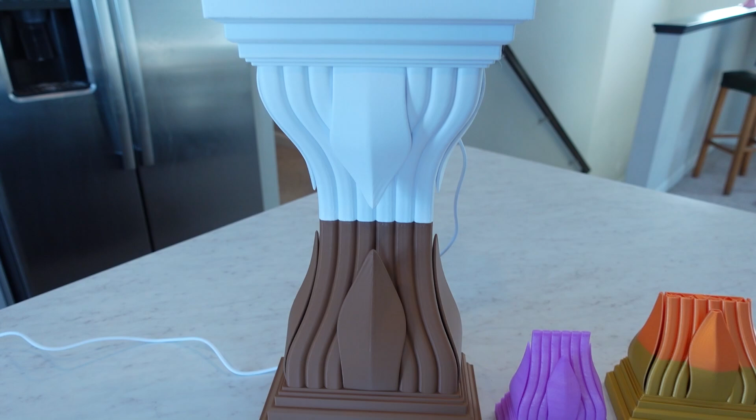Today I want to discuss my process of designing this floating shelf you see here. This floating shelf took approximately $60 so far in filaments. You know, that's part of the game. I just want to say that I love 3D printing. It's good to share what I've been doing and take my lumps along the way, and hopefully you guys learn some things too, as I am.

But this is the white I'm going to go with, cold white, for my first mass production, and that will be for Amazon. I'll list them on all my sites, but mainly for Amazon, and we'll see where we go from there. Hopefully we can go different colors, people will request different colors. The process of it is so awesome, having a new product line, bringing things together.

The one thing that was a huge main flaw, as you can see, this is a glued together one, and they just kept failing, over and over and over again, right here on the supports. I tried four different styles of supports before I decided to design my own supports.

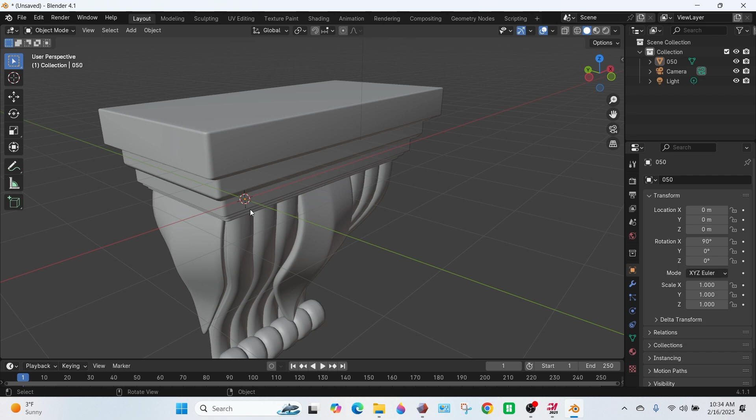So the first thing that's going to happen is it comes in as an object file. What you're going to need is Blender to open that file. So here's the object file open. Then you're going to export this as an STL for the other softwares so they can read it.

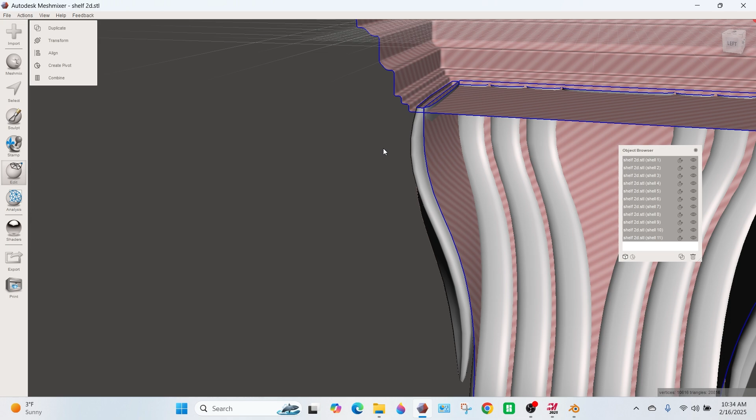So immediately you go into Meshmixer, because I knew it was all just shells, there's no 3D model here, this is all just shells. So what I had to do is go into it, there's a whole lot more, but here's my last imperfection, this huge gap. So you've got to separate shells, go in here and translate this stuff around till all the shells come into play correctly.

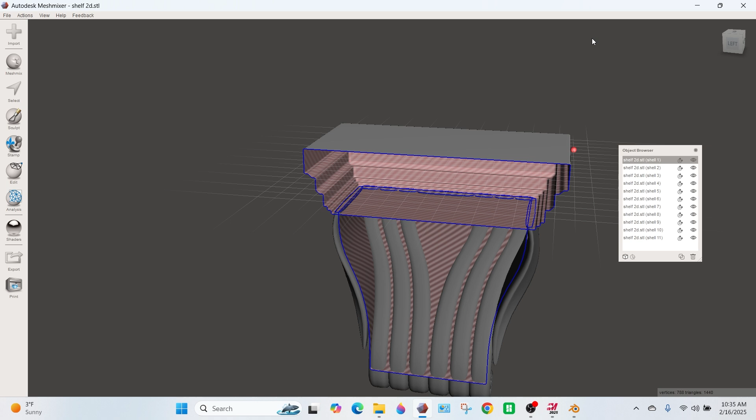And then after that, you're going to want to save that out again as your STL file. At that point there's going to be huge triangles in there. After this, what you want to do is smooth it out.

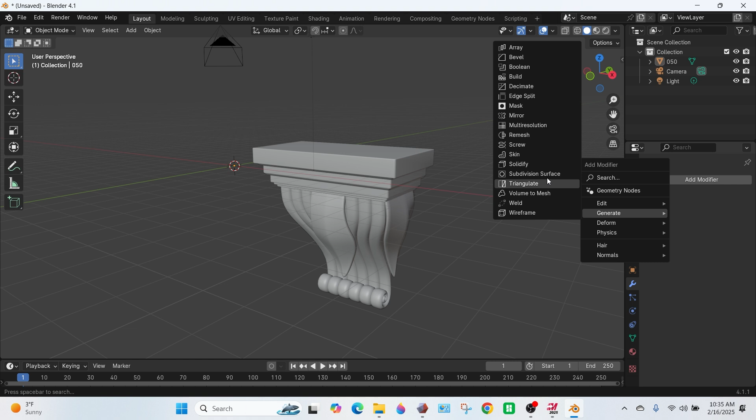So we bring this back into Blender. We do the modifier and add a subdivision surface modifier, is what we're going to add there. We add it all the way up to 4 on that, and we just do a subdivide to smooth the surface.

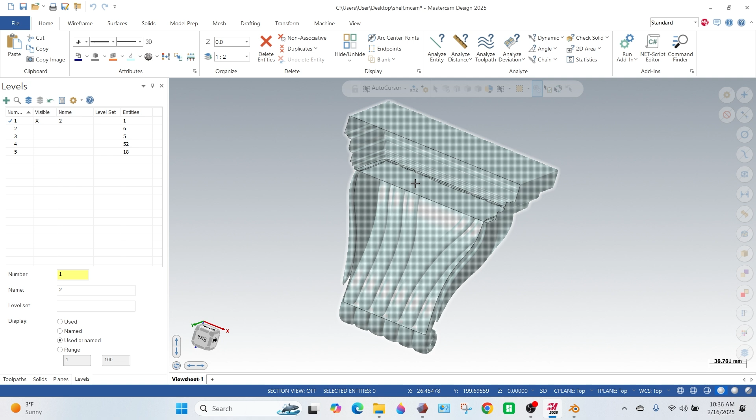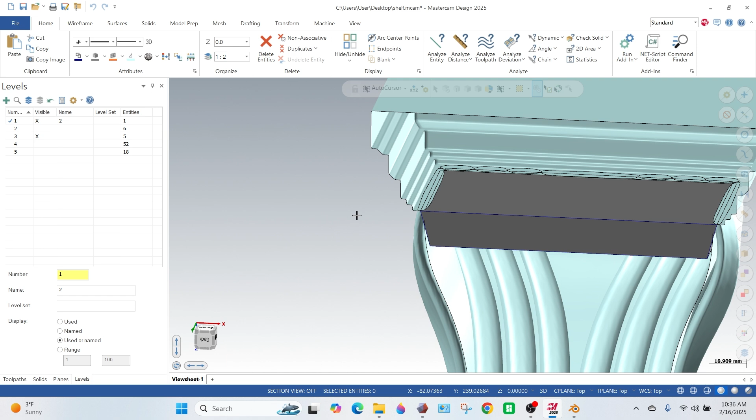Then after that we bring it into Mastercam, and I want to close this. I've already closed the top of these with this surface here, but that surface is getting in the way in Mastercam, so I needed to add the back surface to fill it all in flat. And then I needed to add this surface in here. I added a solid block in there just to make sure it's not going to pick up any air in there, because it did.

So I had to put that in there. That block is just to fill up a void of air in between. There's a micro lift of probably 0.2 millimeters in there that I had to fill in, so I just put a block in there. And now what was going on was...

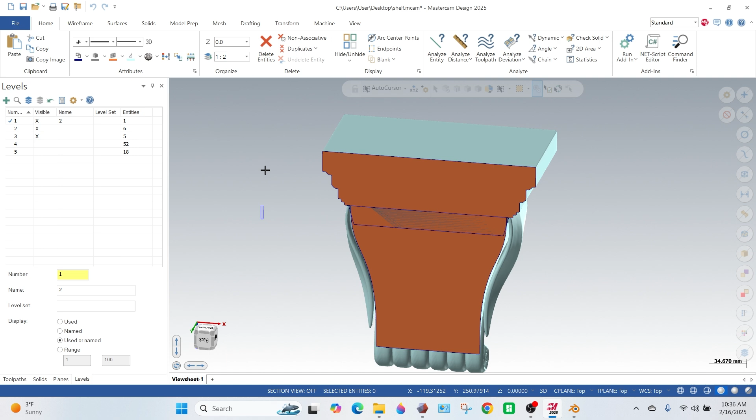my supports are breaking right here and right here, constantly breaking on the ends of these, constantly breaking right here. I had supports go right here, I had supports go all the way to the bottom. It wasn't working out. I wasted all my filament and all my time.

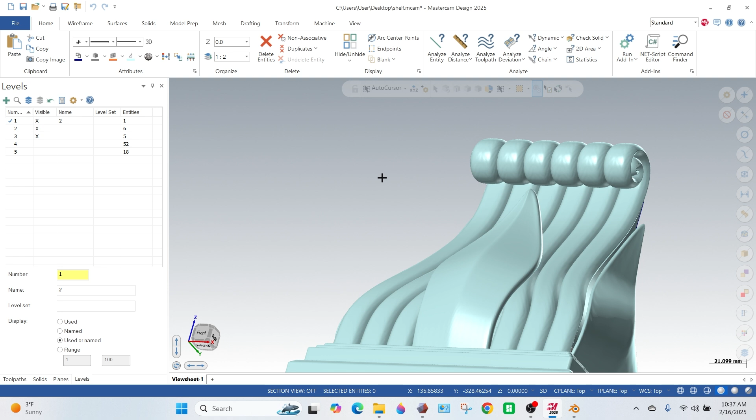So what I did was, right here, I created my own supports. And that's all I did, was just outline the model here the best I could. And I made the supports, I think it's 0.1 or 0.2 millimeter gap in there.

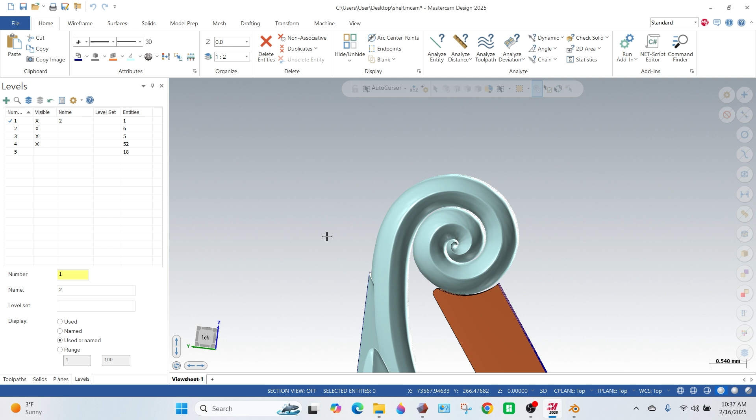If you really get it right to where I want to show it, there's a gap I have in between there, and that's just going to sit in there and hopefully peel right out. Well, not hopefully, it did with the small one. So now we have a big one going in there, and hopefully it's going to work. And if it doesn't, then son of a gun. But no, it will work. If it works here, it should work there, right?

All right, so that's how I went about making that model. So thank you.